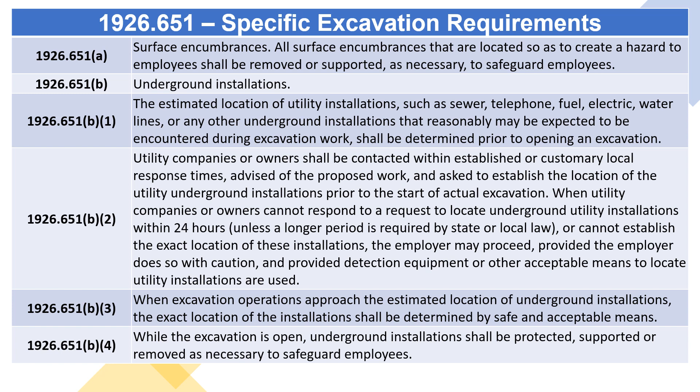1926.651 When excavation operations approach the estimated location of underground installations, the exact location of the installations shall be determined by safe and acceptable means. 1926.651 While the excavation is open, underground installations shall be protected, supported, or removed as necessary to safeguard employees.

1926.651 Access and egress. 1926.651 Structural ramps. 1926.651 (i) through (iv). 1926.651 The structural ramps that are used solely by employees as a means of access or egress from excavations shall be designed by a competent person. Structural ramps used for access or egress of equipment shall be designed by a competent person qualified in structural design, and shall be constructed in accordance with the design.

Ramps and runways constructed of two or more structural members shall have the structural members connected together to prevent displacement. Structural members used for ramps and runways shall be of uniform thickness. Cleats or other appropriate means used to connect runway structural members shall be attached to the bottom of the runway or shall be attached in a manner to prevent tripping. Structural ramps used in lieu of steps shall be provided with cleats or other surface treatments on the top surface to prevent slipping.

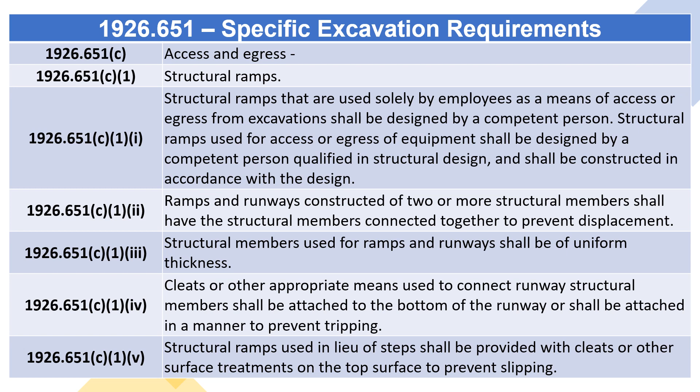1926.651 Means of egress from trench excavations. A stairway, ladder, ramp, or other safe means of egress shall be located in trench excavations that are 4 feet (1.22 meters) or more in depth so as to require no more than 25 feet (7.62 meters) of lateral travel for employees. 1926.651 Exposure to vehicular traffic. Employees exposed to public vehicular traffic shall be provided with, and shall wear, warning vests or other suitable garments marked with or made of reflectorized or high visibility material.

1926.651 Exposure to falling loads. No employee shall be permitted underneath loads handled by lifting or digging equipment. Employees shall be required to stand away from any vehicle being loaded or unloaded to avoid being struck by any spillage or falling materials. Operators may remain in the cabs of vehicles being loaded or unloaded when the vehicles are equipped, in accordance with Section 1926.601(b)(6), to provide adequate protection for the operator during loading and unloading operations.

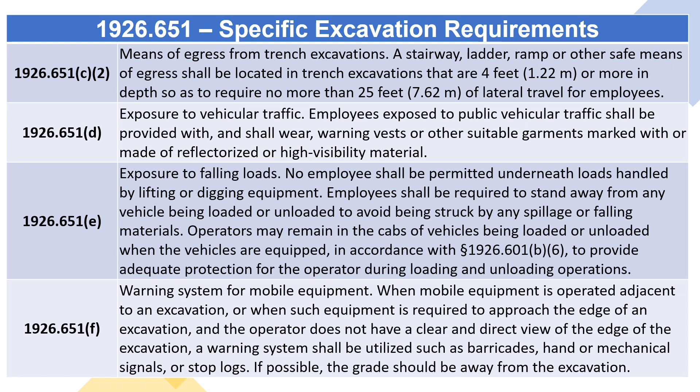1926.651 Warning system for mobile equipment. When mobile equipment is operated adjacent to an excavation, or when such equipment is required to approach the edge of an excavation, and the operator does not have a clear and direct view of the edge of the excavation, a warning system shall be utilized such as barricades, hand or mechanical signals, or stop logs. If possible, the grade should be away from the excavation.

1926.651 Hazardous atmospheres. 1926.651 Testing and controls. In addition to the requirements set forth in subparts D and E of this part, 29 CFR 1926.50 to 1926.107, to prevent exposure to harmful levels of atmospheric contaminants and to assure acceptable atmospheric conditions, the following requirements shall apply.

1926.651(g)(1)(i) through 1926.651(g)(1)(iv). Where oxygen deficiency, atmospheres containing less than 19.5% oxygen, or a hazardous atmosphere exists or could reasonably be expected to exist, such as in excavations in landfill areas or excavations in areas where hazardous substances are stored nearby, the atmospheres in the excavation shall be tested before employees enter excavations greater than 4 feet (1.22 meters) in depth.

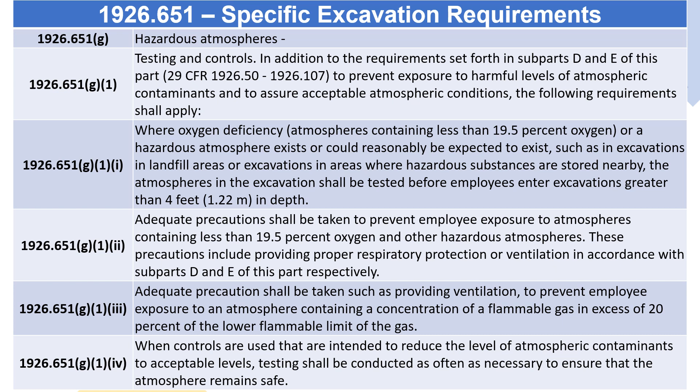Adequate precautions shall be taken to prevent employee exposure to atmospheres containing less than 19.5% oxygen and other hazardous atmospheres. These precautions include providing proper respiratory protection or ventilation in accordance with subparts D and E of this part respectively. Adequate precaution shall be taken such as providing ventilation to prevent employee exposure to an atmosphere containing a concentration of a flammable gas in excess of 20% of the lower flammable limit of the gas. When controls are used that are intended to reduce the level of atmospheric contaminants to acceptable levels, testing shall be conducted as often as necessary to ensure that the atmosphere remains safe.

1926.651(g)(2) Emergency rescue equipment. 1926.651(g)(2)(i) Emergency rescue equipment, such as breathing apparatus, a safety harness and line, or a basket stretcher, shall be readily available where hazardous atmospheric conditions exist or may reasonably be expected to develop during work in an excavation. This equipment shall be attended when in use.

1926.651(g)(2)(ii) Employees entering bell-bottom pier holes, or other similar deep and confined footing excavations, shall wear a harness with a lifeline securely attached to it. The lifeline shall be separate from any line used to handle materials, and shall be individually attended at all times while the employee wearing the lifeline is in the excavation.

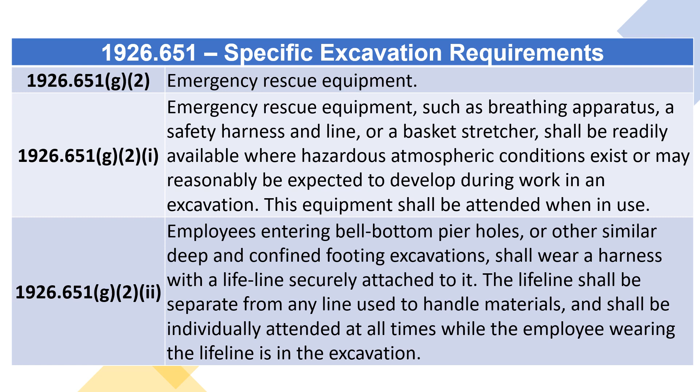1926.651(h) Protection from hazards associated with water accumulation. 1926.651(h)(1) Employees shall not work in excavations in which there is accumulated water, or in excavations in which water is accumulating, unless adequate precautions have been taken to protect employees against the hazards posed by water accumulation. The precautions necessary to protect employees adequately vary with each situation, but could include special support or shield systems to protect from cave-ins, water removal to control the level of accumulating water, or use of a safety harness and lifeline.

1926.651(h)(2) If water is controlled or prevented from accumulating by the use of water removal equipment, the water removal equipment and operations shall be monitored by a competent person to ensure proper operation. 1926.651(h)(3) If excavation work interrupts the natural drainage of surface water, such as streams, diversion ditches, dikes, or other suitable means shall be used to prevent surface water from entering the excavation and to provide adequate drainage of the area adjacent to the excavation. Excavations subject to runoff from heavy rains will require an inspection by a competent person and compliance with paragraphs (h)(1) and (h)(2) of this section.

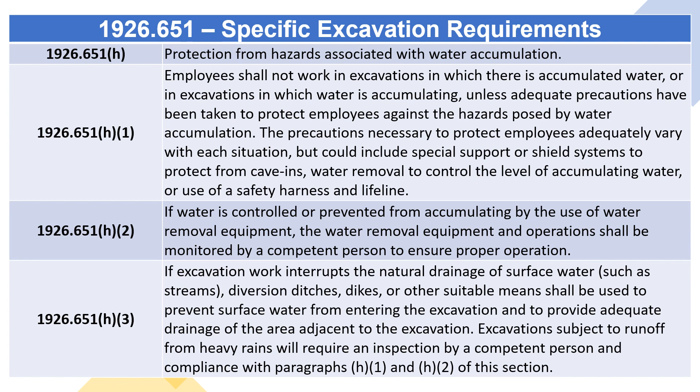1926.651(i) Stability of adjacent structures. 1926.651(i)(1) Where the stability of adjoining buildings, walls, or other structures is endangered by excavation operations, support systems such as shoring, bracing, or underpinning shall be provided to ensure the stability of such structures for the protection of employees.

1926.651(i)(2) through 1926.651(i)(2)(iv) Excavation below the level of the base or footing of any foundation or retaining wall that could be reasonably expected to pose a hazard to employees shall not be permitted except when a support system, such as underpinning, is provided to ensure the safety of employees and the stability of the structure, or the excavation is in stable rock, or a registered professional engineer has approved the determination that the structure is sufficiently removed from the excavation so as to be unaffected by the excavation activity, or a registered professional engineer has approved the determination that such excavation work will not pose a hazard to employees.

1926.651(i)(3) Sidewalks, pavements, and appurtenant structure shall not be undermined unless a support system or another method of protection is provided to protect employees from the possible collapse of such structures.

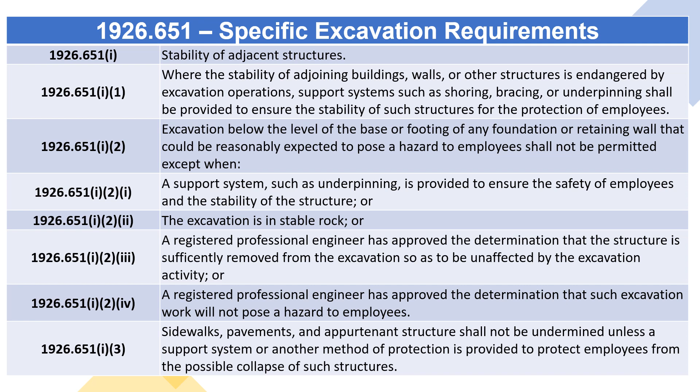1926.651(j) Protection of employees from loose rock or soil. 1926.651(j)(1) Adequate protection shall be provided to protect employees from loose rock or soil that could pose a hazard by falling or rolling from an excavation face. Such protection shall consist of scaling to remove loose material, installation of protective barricades at intervals as necessary on the face to stop and contain falling material, or other means that provide equivalent protection.

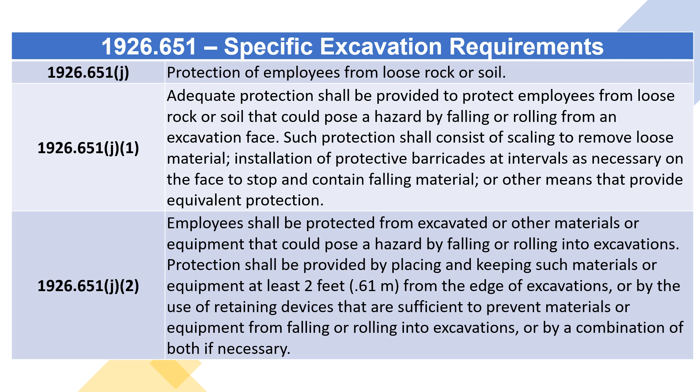1926.651(j)(2) Employees shall be protected from excavated or other materials or equipment that could pose a hazard by falling or rolling into excavations. Protection shall be provided by placing and keeping such materials or equipment at least 2 feet (0.61 m) from the edge of excavations, or by the use of retaining devices that are sufficient to prevent materials or equipment from falling or rolling into excavations, or by a combination of both if necessary.

1926.651(k) Inspections. 1926.651(k)(1) Daily inspections of excavations, the adjacent areas, and protective systems shall be made by a competent person for evidence of a situation that could result in possible cave-ins, indications of failure of protective systems, hazardous atmospheres, or other hazardous conditions. An inspection shall be conducted by the competent person prior to the start of work and as needed throughout the shift. Inspections shall also be made after every rainstorm or other hazard increasing occurrence. These inspections are only required when employee exposure can be reasonably anticipated.

1926.651(k)(2) Where the competent person finds evidence of a situation that could result in a possible cave-in, indications of failure of protective systems, hazardous atmospheres, or other hazardous conditions, exposed employees shall be removed from the hazardous area until the necessary precautions have been taken to ensure their safety.

1926.651(l) Walkways shall be provided where employees or equipment are required or permitted to cross over excavations. Guardrails which comply with Section 1926.502(b) shall be provided where walkways are 6 feet (1.8 meters) or more above lower levels.